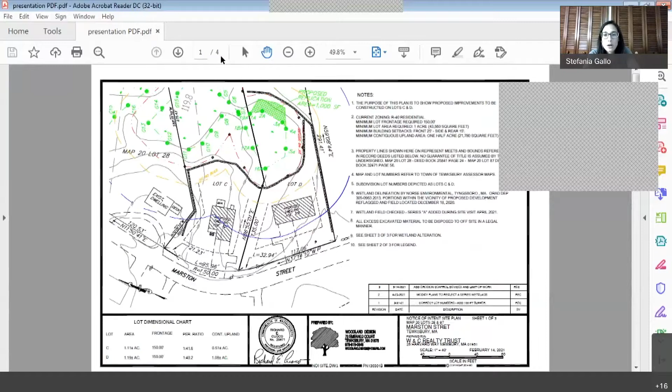And then the last thing was just about the trash and the junk and the potential for contamination. I'm not sure if there are contaminants on the site, but I did get a call about a potential for contaminants, so I just wanted to bring that up. And then I did have conditions that I would recommend to the commission.

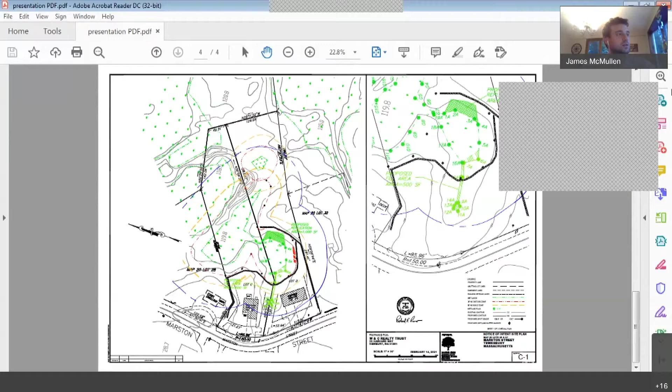Excuse me, on the revision 3 drawings, on the legend, it looks like the 50-foot no-build zone is listed twice. I assume one should be the 100-foot buffer.

Mr. Kuko, which sheet was that, sir? Oh yeah, I see what you're saying. Yeah, that should say 100-foot buffer zone. We'll correct that and get that over to Stefania.

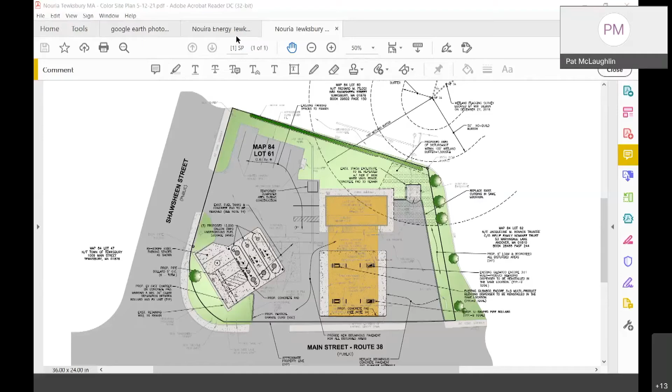So the approved stormwater system from 2019, we ramped up to do the work, then COVID came in, and then by the time we got refocused to take up that scope of work and excavate to put in that stormwater system, we were approaching the right time in the lifespan of the underground tanks to just do this disturbance at the same time.

So the stormwater intent is still the same as it was, and it'll address that issue that, yes, I'm sure you've seen a number of times if you frequent this location. Yes, I have. It's actually a free car wash if you go through pretty quickly.

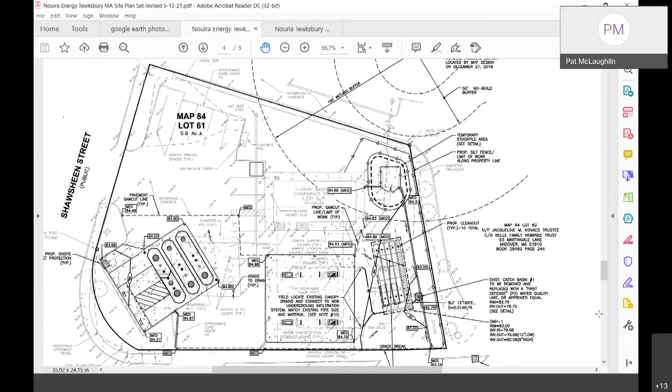I don't have any questions. Brian, do we have any callers? We have no callers, Mr. Chairman. Board member, any other issues?

No questions. Okay, hearing none and having no callers, I'm going to entertain a motion to close the public hearing for amended order of conditions, Nouira Energy Corporation, 1975 Main Street, map 84, lot 61, DEP 3051075.

Can I have a motion to that effect? So moved. Can I have a second? Second. Mr. McMullen, how do you vote? Aye. Mr. Ronan, aye. Mr. Sheehan, aye. Mr. Walsh, aye. Chair votes aye as well.

Now I'll entertain a motion to approve the request for amended order of conditions, Nouira Energy Corporation, 1975 Main Street, map 84, lot 61, DEP 3051075.

Can I have a motion to that effect? So moved. Can I have a second? Second. Mr. McMullen, how do you vote? Aye. Mr. Ronan, aye. Mr. Sheehan, aye. Mr. Walsh, aye. And chair votes aye as well.

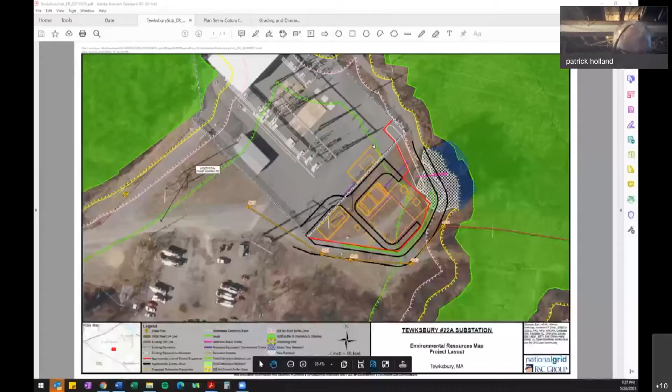Excuse me, Mr. Chairman, I'm going to step down on this. I abut that property. Okay, you did receive a notice then, correct? Yep. Okay. Please take note, Mr. Sheehan is recusing himself from this one.

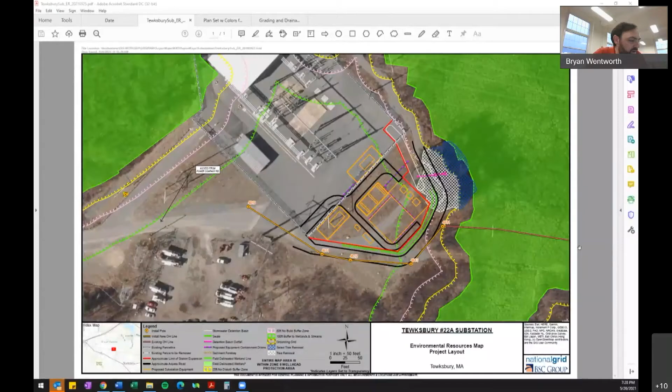Okay, the floor is yours again. So New England Power Company is proposing an expansion of their existing Tewksbury number 22A substation, calling it a static synchronous compensator, or STATCOM for short, substation expansion. The expansion is required to accommodate the retirement of Exelon's fossil fuel fired Mystic generating station, preparing for more renewable energy generation sources.

The expansion, you can see on the screen here. This is the existing 22A substation. The expansion is proposed within this red line, which represents the proposed 8-foot chain link fence around the substation. The work includes expansion of the substation, and relocation of the existing gravel road which goes around the substation, providing access to the transmission lines on the north side. That access road will be relocated around the exterior of the expanded substation.

Relocation of existing distribution line poles. The existing lines extend over the area where the expansion is proposed, so these orange dots represent the new distribution poles required to circumvent the expansion. Also, there's an additional relocation of a distribution pole in this location here.

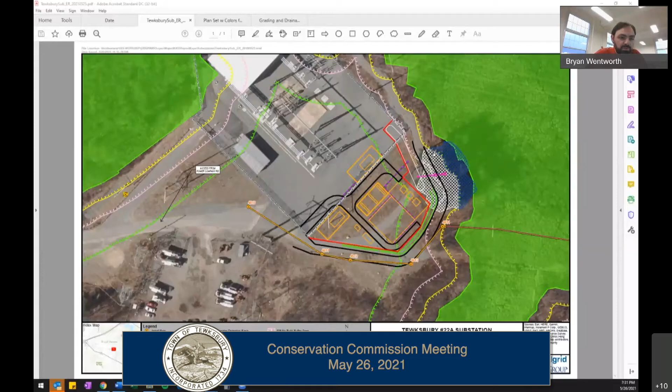The tree removal is necessary. It poses a threat to the integrity of the substation—I believe it's some tall pines, and the access road will probably put stress on the root system.

So the project proposes no BVW impacts. The one distribution pole, 4814, is located just off the proposed gravel access road, along the no-disturb buffer. We believe a push pole will be required to support that pole, which will go just into the no-disturb zone, so our NOI is requesting a waiver for that work.

Other than that, the stormwater design has been designed to meet or exceed the Massachusetts Stormwater Handbook. It includes a grass swale along the outside of the expanded substation, a sediment forebay in this area, and an infiltration basin sized to meet all the water quality volumes and applicable treatment needs for the site expansion.

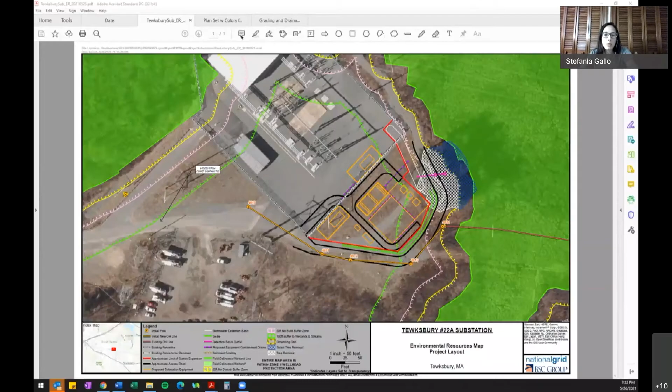The only thing I would bring up is that I went out to the site with someone from BSC Group, and I asked to see a plan set with a clearer limit of work, erosion control line, and no disturb zone disturbance on all the plan sets. I know some sheets show the erosion control line and others just show where the work is going to be, but all that information should be on all the sheets so we can compare and make sure everything's in the right place.

Other thing I will mention, the project is being reviewed by the engineering department because it needs to meet the stormwater standards. So we'll want to wait for that review before we make a decision.

I did draft up some conditions that I would recommend. I can either read them out this meeting or at the next meeting. I think you can read them out at the next meeting, but make sure you forward them to the applicant so they have a chance to view them also. Yes, I did, and they said they were okay with them.

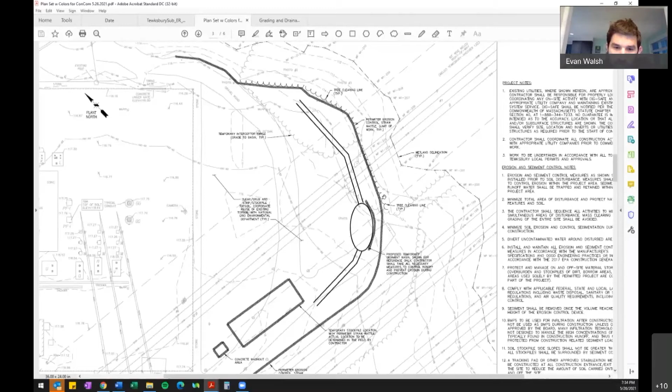Where the infiltration basin's going, or the detention basin, is it going on existing concrete in the back corner? Are you jackhammering that concrete, or is that crushed stone where the arrows are pointing to the infiltration basin in this corner? Is that existing concrete that you're jackhammering out?

No, that would be substation yard stone. Okay, just the ortho map looks like concrete. I believe they had put some sort of structure there recently that's going to be relocated to another location of the plant, so that might be what's shown there. Okay.

I have no questions, but we're going to keep the public hearing open. So the action on behalf of the applicant is you're going to provide Stefania with plans that show all the erosion controls on each sheet. We can do that. And the other action is on behalf of the town, that would be Mr. Hardiman, I presume. Correct, Stefan. Okay, so those are the two items we're going to wait on.

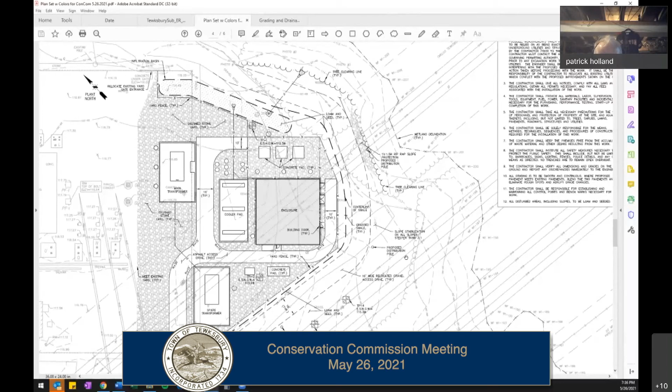I'm going to entertain a motion to continue this public hearing to our next meeting of June 9th. I'll entertain a motion to continue notice of intent, Andrew Code, New England Power Company, 205 Washington Street, map 49, lot 34, DEP pin number 3051137, to our June 9th meeting. Can I have a motion to that effect? So moved. Can I have a second?

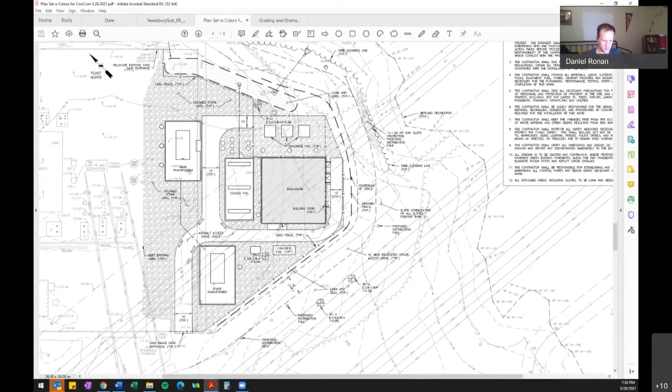Mr. McMullen, how do you vote? Aye. Mr. Walsh, how do you vote? Aye. Mr. Ronan, how do you vote? Aye. The chair votes aye as well. Thank you, sir. Thank you, Chairman. Mr. Chairman, thank you, Board.

Okay, last on the agenda items is an extension. Is Mr. Sheehan back? I think the TV's, he's probably watching it and knows he's 30 seconds behind.

Item F is an extension request for Chris Duggan and Son Construction LLC, 1418 Main Street, map 59, lot 55, DEP number 3051031. Anybody here for that? Hearing nothing? Stefania, fill us in. The applicant is here. Oh, he is. I don't know if maybe he...

Hello. Hi. Hello. Oh, hi, how are you? Finally figured it out, not that technical here. How you doing, Chris Duggan? How are you? I'm well. I could barely hear you, but you hear me now? Yep, okay. How you doing? My name is Chris Duggan.

I'm trying to get an extension for this project on 1418 Main Street. Okay.

Well, the first question I have is, how long is the original order of conditions good for, Stefania? 3 years. What was the date of issuance of the first order of conditions? December 2017. Okay, what would 3 years be from that date? December 2020, however, with COVID, things are not expiring. Okay, that was my only question.